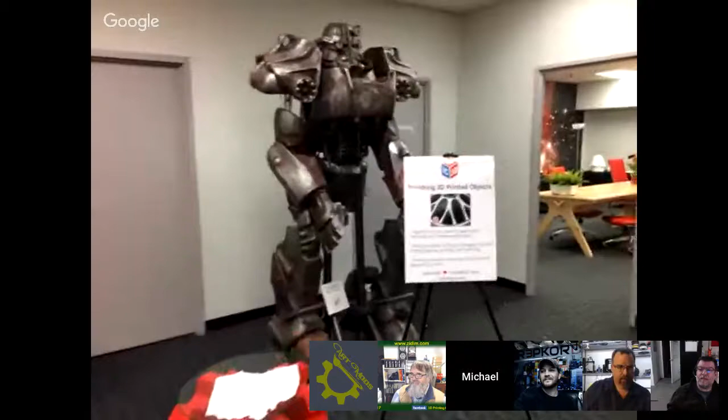This is a Fallout 4 T60. It's nearly all 3D printed, about 100 pounds of PLA. One of our customers, a big cosplayer, Yasu Tano, wanted to pursue this project, and long story short, we ended up sponsoring it, and he retired it, so it's on display in our lobby. Open source coffee table we designed and printed.

This is a main conference room with where we have more of the kind of industrial sample parts. We work with mainly manufacturers from various industries like automotive, people building fire trucks, aerospace, and so forth. There's the 20-inch wheel that we've taken to MRRF and ERRF and other events.

So now I'll walk back to the room of manifesting. So wordplay between manufacturing and manifesting.

So our print service right now has about 20-something printers. This is our largest one. Her name is Norma. She's about 39 inches cubed, about a cubic meter.

Back in this corner, there's about a dozen desktops. Most of them are Lulzbots, TAZ 6s and minis. We've got some gCreate, some FormBots. So some of them have makeshift heater chambers, as you can see.

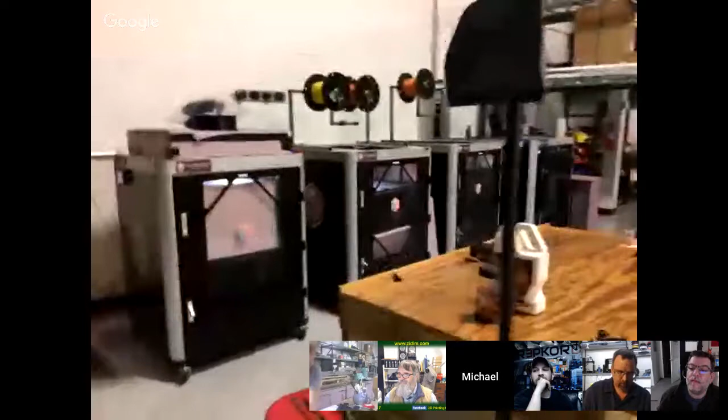Right there, these are 4 kind of medium-sized printers. We mostly designed and built. They're about 24 by 30 tall, printing various things. Let's see here. Another architecture model. Most of the time, I have no idea what's printing.

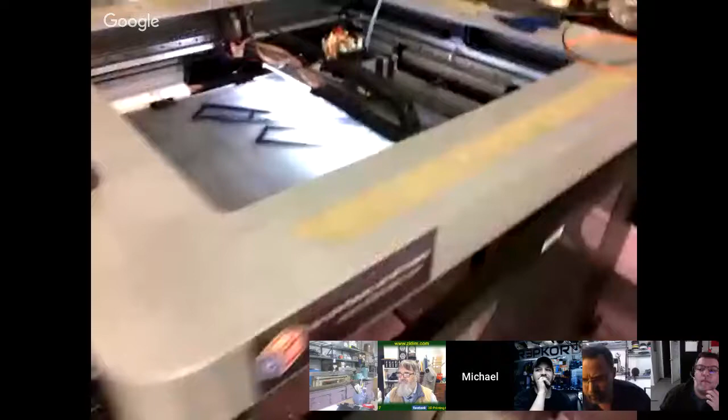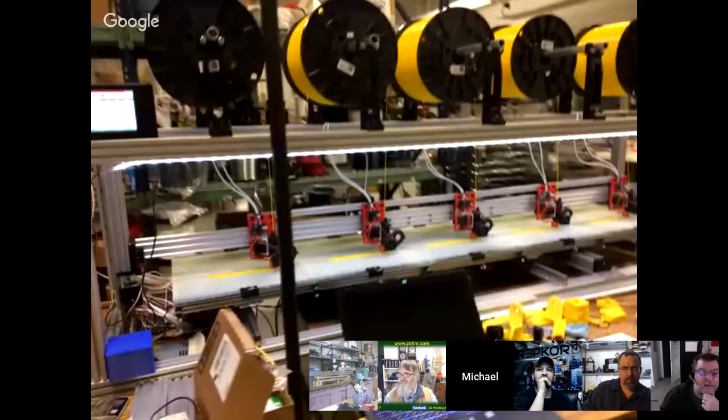Here's a little kind of side project we were doing. This is a printer with 5 heads. So it's basically just like what you would think. It's 1 master and 4 followers. This is about fully loaded. This is about 50 kg, about 10 kg spools. So that's kind of fun.

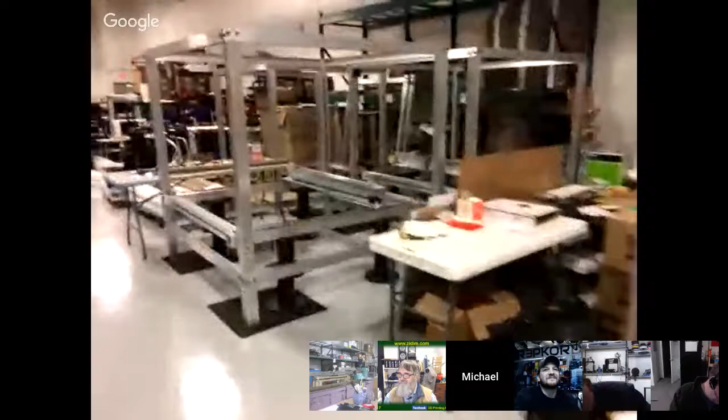Over here, we're building 4 larger printers. These, when they're done, they'll be 48 by 48 by 42 tall. We're doing 4 of these at the same time. To be clear, we do not sell hardware at the moment. We mainly design and build hardware for internal use to solve a problem for a customer.

So you can see those guys. It's going to be all lead screw driven. So the Z will have 4 lead screws. It'll be IDEX. So the gantry there is designed to hold the two X screws. Slides like so.

This is the end of the line with the respooler or the filament winder. And this is where the 10 kilogram spools are produced. And back over here, we'll take those 10 kilograms and we'll respool them into 1 kilogram and 2.3 kilogram. So behind me is the wall of finished goods.

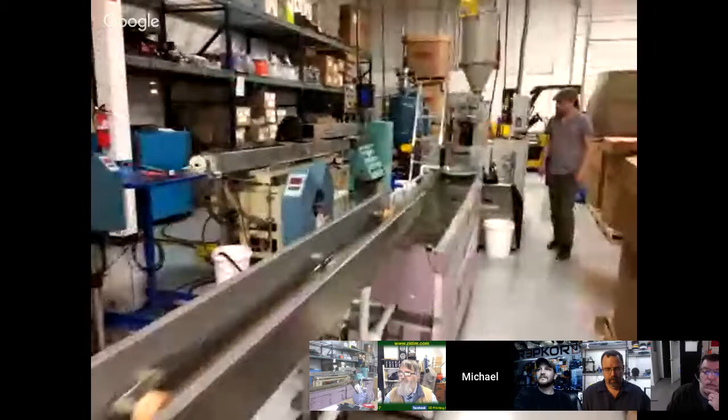So now I'm just walking you to the very back of the building, kind of where it starts and where we buy, or where we house our raw material that we buy. So we get these kind of pallet-sized containers called Gaylords. They're just under a ton, about 1,700 pounds.

So this is our ABS here. So it's just virgin pellets. Looks like rice beads. And then is our PLA, the Ingeo NatureWorks product. Back here is PETG.

And then we keep these bins when we have scrap or purge, when we have to change over the materials or colors in the line, or material that's out of spec. We'll put them back into empty containers, and we have recyclers that come and pick up the stuff.

When you first get resin, it's got moisture, so you have to dry that before you start extruding. We put them through these Novatec desiccant dryers, which basically blow hot air through desiccant and then up through the resin.

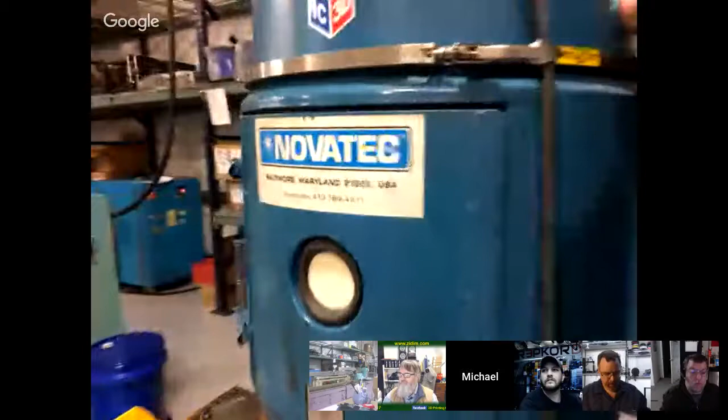Kind of see through there. The boxes on the middle shelf, that's all the master batch - the different colors we use to mix in with the natural resin to get all the colors we want.

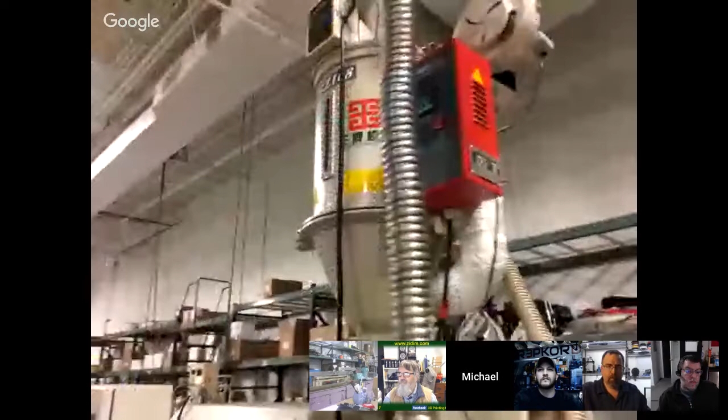And then after that, they get fed into the hopper up there. We have two lines, and this is our newer line, what we call line 2. Again, our material is open source. We decided to go open source a little over a year ago.

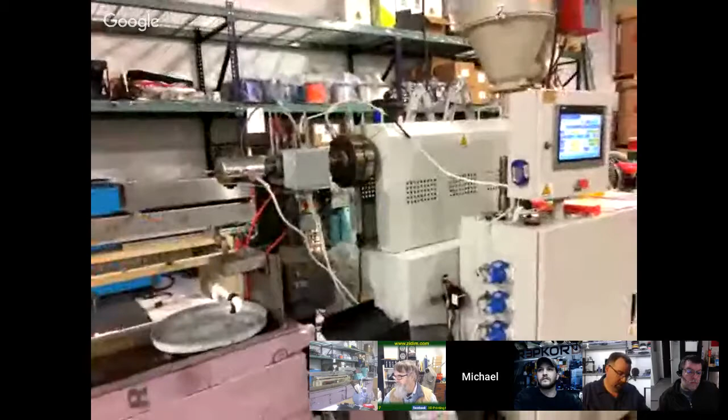A lot of that was in conversation with Lulzbot, but we shared the same values, and our belief was that the more people who know how to make filament, the more material options there are, and the better future we'll all have in manufacturing and 3D printing.

So there's Sean, looking ready, I think. Okay, cool. So I'm gonna let you take it away there. Well...

So I just finished setting up the line, moving stuff around, getting everything ready to rock and roll. The bath is heated, the extrusion line and extruder are heated. There's 7 chambers, and all chambers are heated. We're ready to start making some material.

Are you ready? I'm ready. Okay, so we're going to start with our puller, which is the track, and get that up to speed. We're going to start that and pop it up to about 13, just to get it rolling.

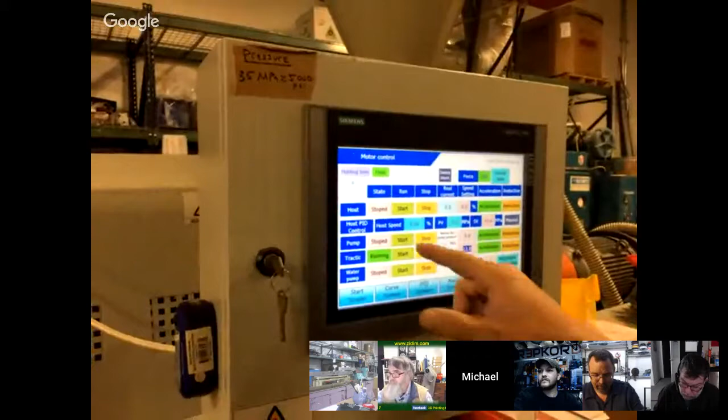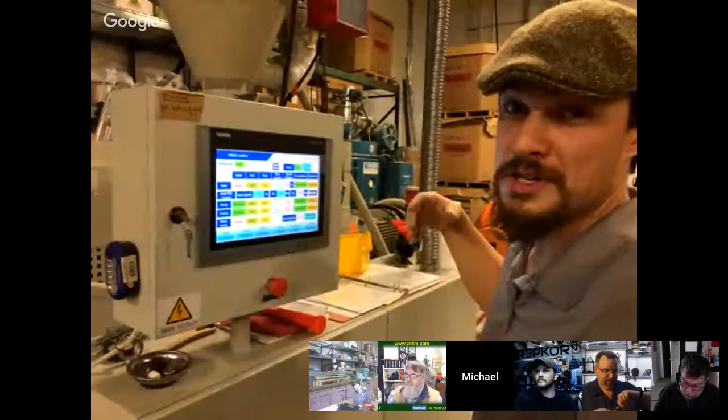And then we'll go with the pump, which is going to be helping pull the filament out of the die. So this is our industrial extrusion - not the smaller one that we have. There's more intricate things with this one than the other one.

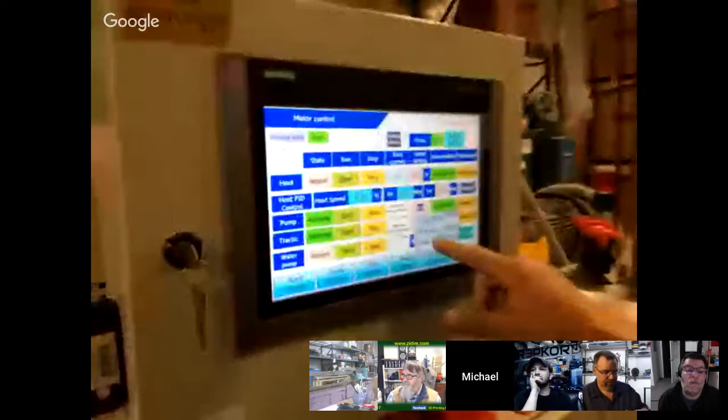The pump I'm going to be putting at about 7. So now filament should be starting to come out of the die. And I'm going to put the screw, the host, up to start at 10.

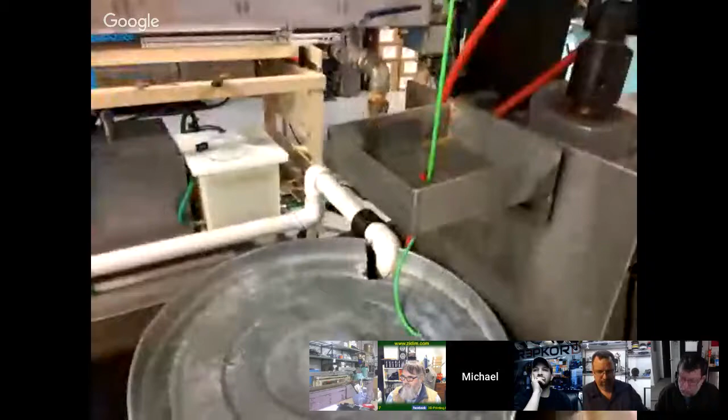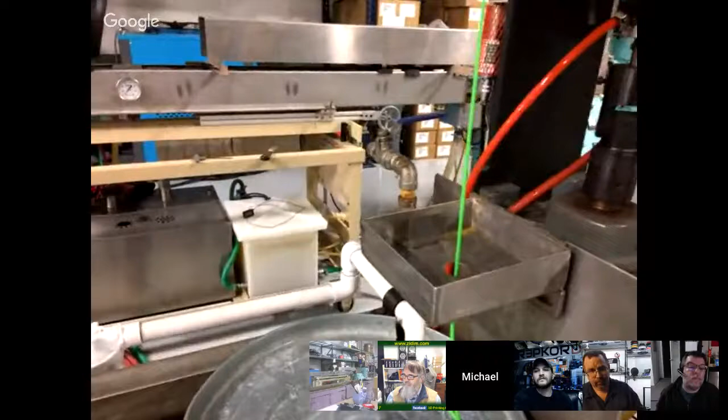That's probably about a little over 5 millimeters coming out of the die right there. And that'll get pulled down to the correct size by the puller.

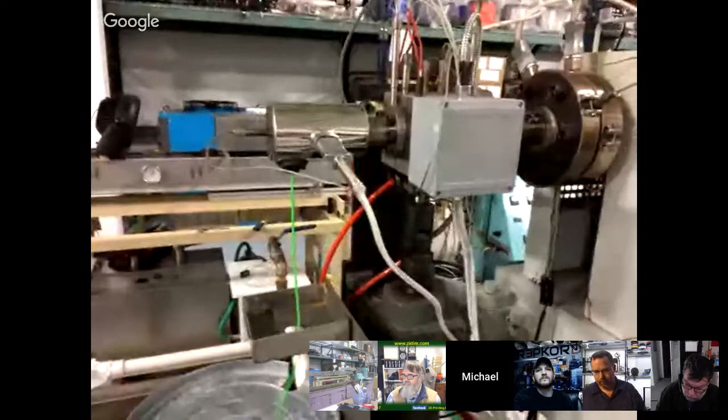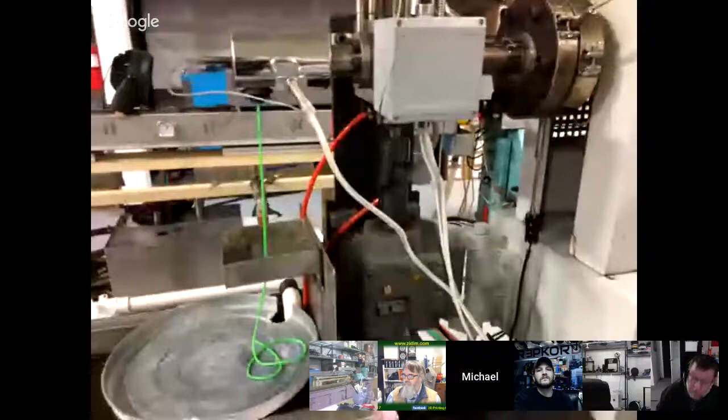I'll show you, let me explain this. This is the gear pump or the melt pump. It sits in between the extruder, which is mostly under that cover right there, and the die. What the gear pump does is it basically controls the volumetric flow rate, because there could be inconsistencies just from the screw itself. By having this volumetric flow control, you get a much more consistent strand, and you can basically pull faster too.

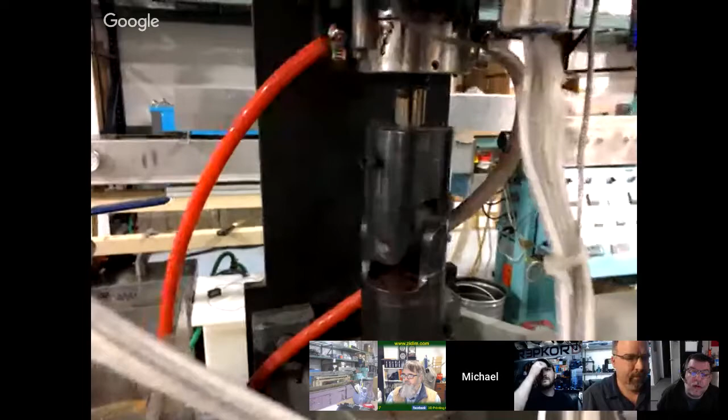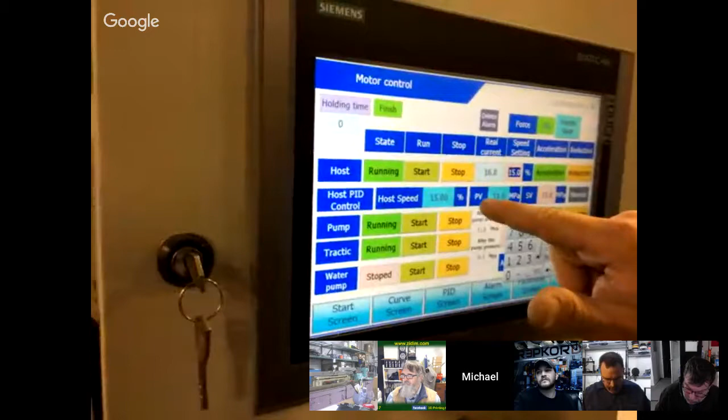So you can see that coupler going there. As of right now, I am just taking - this is PV, pressure. This is the pressure that is inside of the machine. And as this pressure rises, more heat is going to be generated because the screw is turning, creating friction.

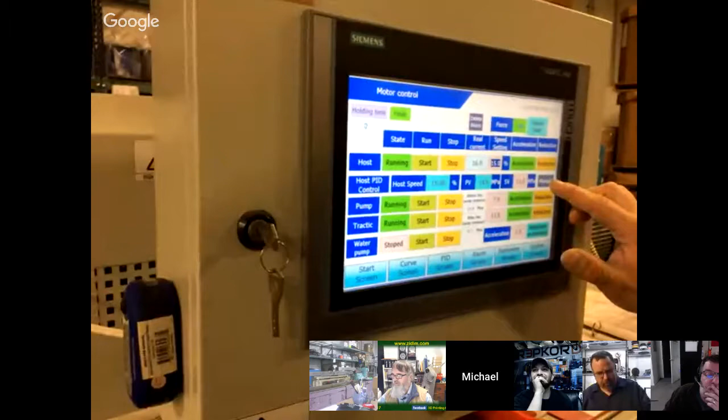Once this number starts going up, I'm going to throw it into auto when it gets to 15. So as of right now, that's all I'm doing at this point. It's boring, bear with me. I'll just make people look at you. That's fine.

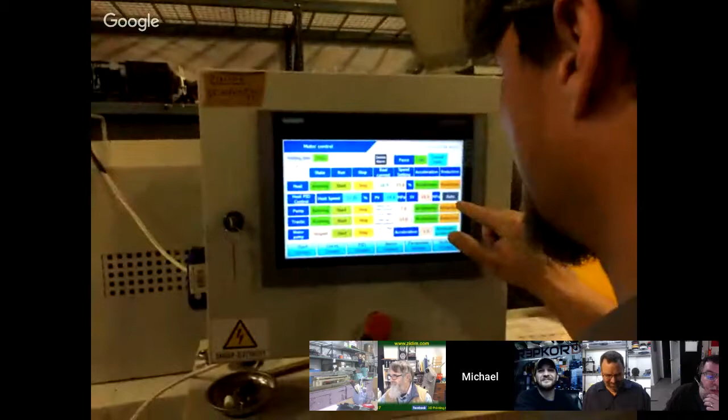There you go, there's an over-the-shoulder shot of you. Beautiful. Okay, so now we have it set in auto. It is going to keep the pressure inside of the machine around 14, 15 in that area. It should keep it at a constant 15 in just a moment - megapascals, MPa.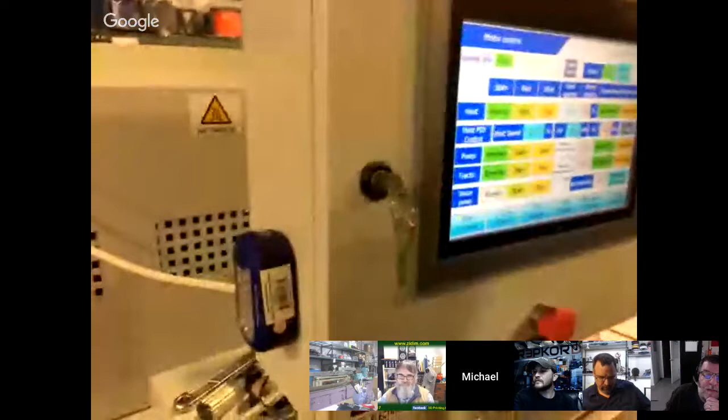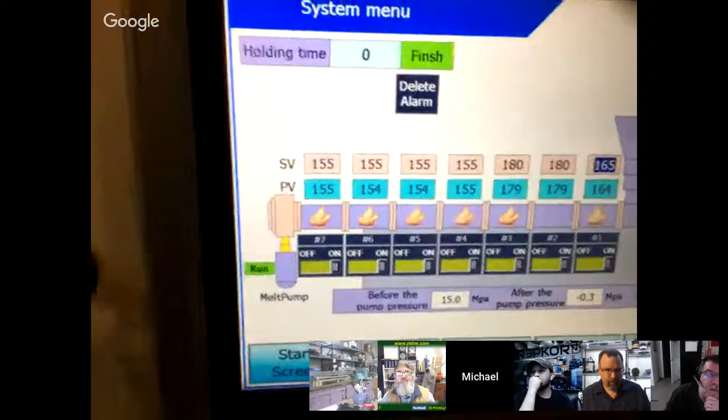Let me show you another screen that's kind of fun. This is where we set all the heat temperatures of the different zones. You can see zone 1 through 7. You'll see the little fire icon - that means it's, like PID, it turns on, kicks on when it needs to. You'll also see a little blower icon when it wants to cool.

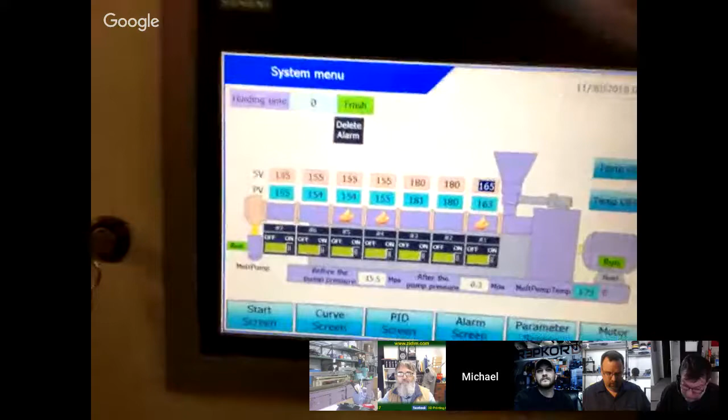So seven zones. Basically, zones one to 3 are heating the barrel of the screw. Zone 4 is this guy, which is where the breaker plate is - basically that's where we separate and take off to clean the filter. There's a little metal steel mesh filter in there. So all of this is zone 4 right here.

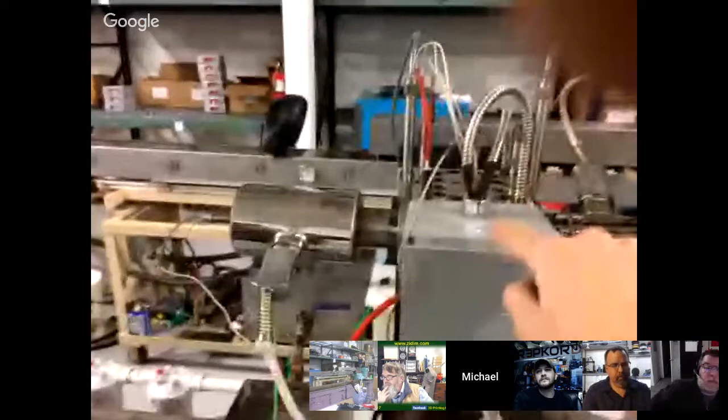And then the melt pump, this gearbox thing right here, there's zone 5 and 6. And then zone 7 is the die.

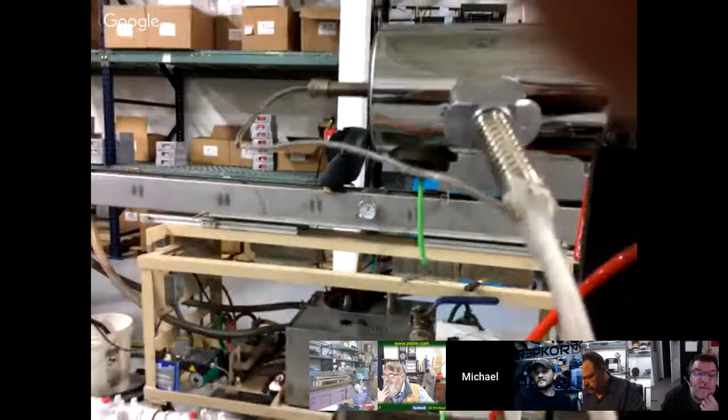So we're about to cut this. We go scoop, pull, ready. Then you snatch it and you pull them along - very slowly, very gently.

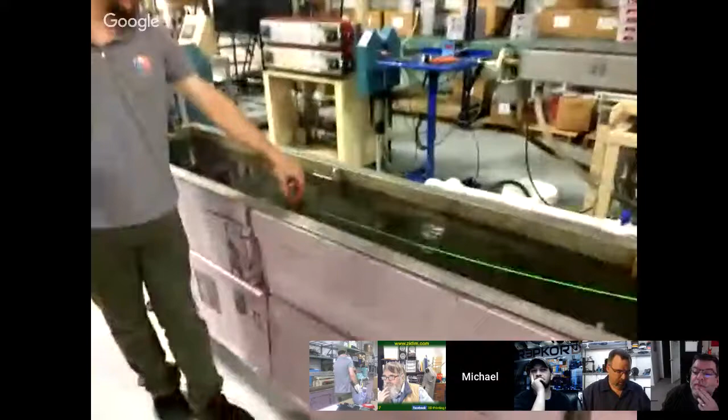So this is stringing up the line. It pretty much has to be done at the beginning of the shift, beginning of the day, because you're basically trying to take melted material there and feed it eventually through the puller, which is going to pull. It's like the drummer in the band - it's gonna keep the beat of everything, and that's how you tune in your size.

So this water bath is heated water. That's the water, kind of the industrial water heater right there.

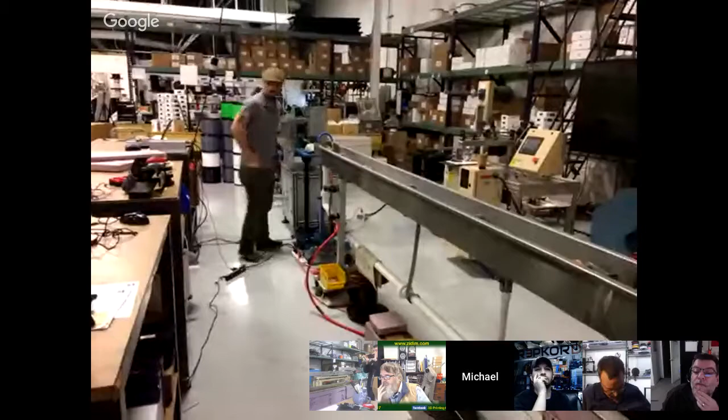So Sean is hooking up the equipment. It's going to get a little loud, so I'll step back for a minute. He said that is the air wipe or air knife. Its purpose is to blow all the water off of the line. Sorry, it's going to get loud as I walk past this thing.

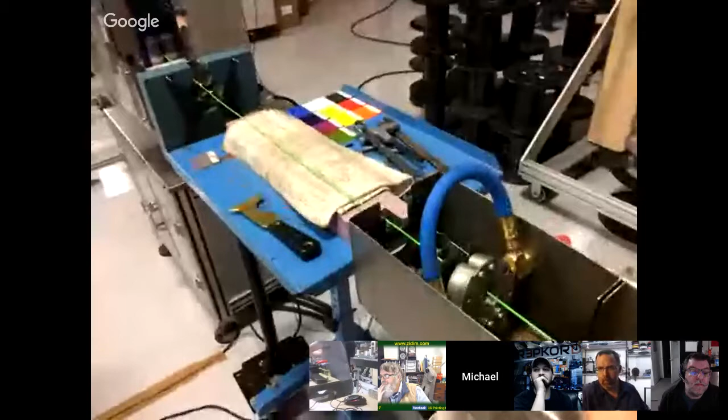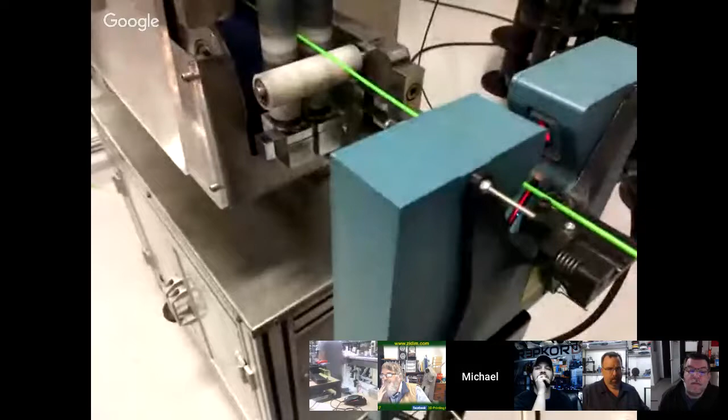But that's the air wipe right there. That guy is our laser gauge. It's a dual axis laser gauge.

That's the puller. As you see, it's just dumping the filament on the floor right now because Sean is going to tune everything and make sure the reading on the laser gauge on our app is in spec before he starts putting it onto a spool.

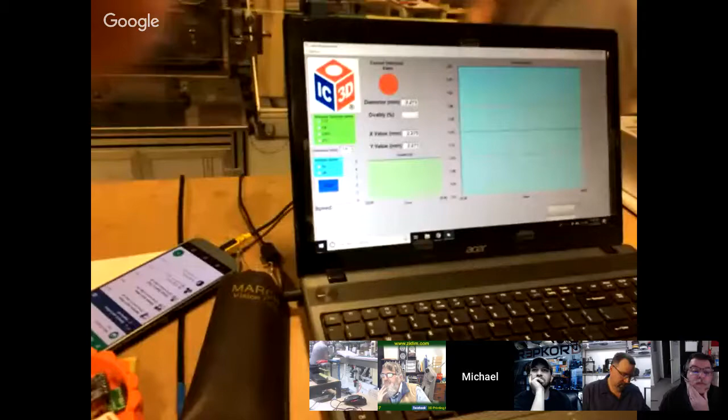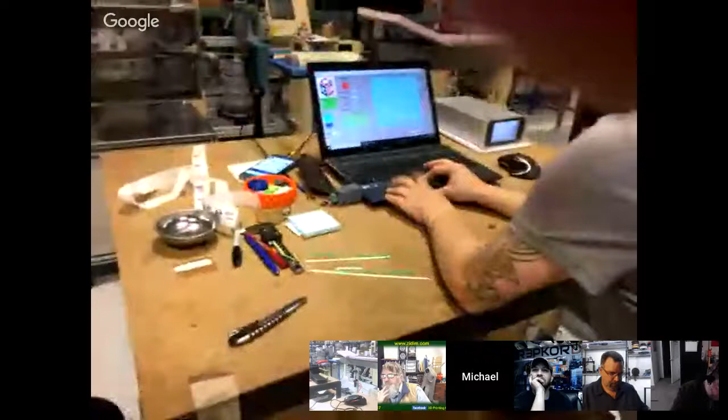While he's setting things up, this is what the app looks like. The laser gauge is basically taking two measurements 90 degrees apart, so you get an X and Y measurement, and that outputs in real time. It also calculates the average diameter, but also gets us the ovality or roundness, which we get as a percentage.

Hey Michael or Sean, can you guys hear me? This is Chris. I had a good question in the room. Jim was asking what is your spec tolerance on the filament diameter?

Our spec tolerance that we advertise is plus minus 0.05. Internally, we keep our spec at plus minus 0.03. Oftentimes it's averaging 0.025. Pretty respectable.

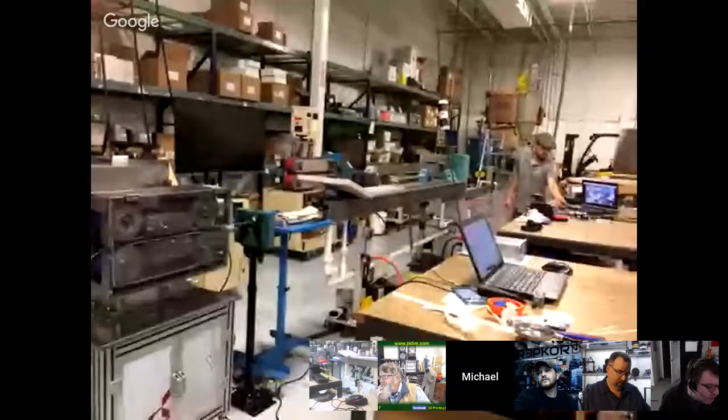Also, there was a question earlier, I think from Robbie. They were looking for some examples of things you've done, services or jobs for the commercial space print-wise. I pointed out the wing you did for the rally car, but maybe you have some other examples worth sharing. Yeah, sure.

Sean's still setting up, so I'll walk you to the sample room and show you a couple more industrial things that we do. Just take a minute, turn you back around.

We work with a lot of automotive manufacturers, so we're literally prototyping car parts for them, like this, so they can build up a whole assembly. Looks like this is part of a door panel.

This is from a lot of vacuum form molds we've done, probably 50 or 60 this past year. This is an example, printed out of PC PBT, and this was something our customer vacuum formed over.

This one is made from DuPont Hytrel. We do this for a tire manufacturer, and we'll print this as a full circle, about 3 feet in diameter, with a hexagon pattern. Let me see if I can arrange my phone to show you how this behaves.

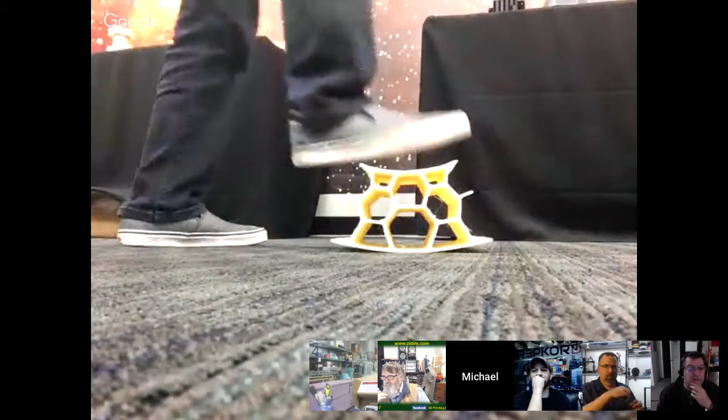You guys see that? So this is made for Humvees, off-road vehicles like ATVs, and commercial lawnmowers. It's airless, so it's puncture proof technically. We do those prototypes.

This is a part before the support is removed. These go to a local company that makes fire trucks, Sutphen, and the products go straight from our printers to their assembly lines, where they're assembling it onto their customers' products.

We do a lot of jigs and fixtures like this, things that just go into factories. This is a stamping mold we've done. We've formed about 1 millimeter thick aluminum over it. This is hydroformed, and what's interesting is you can actually see the 3D printed lines pressed into the sheet of aluminum because it was formed at 11,000 PSI.

Michael, do you know what material that was printed out of? Was it PLA, ABS? Yeah, this was an initial experiment, an 80% infill PLA. So this is literally just a brick of plastic. Nice.

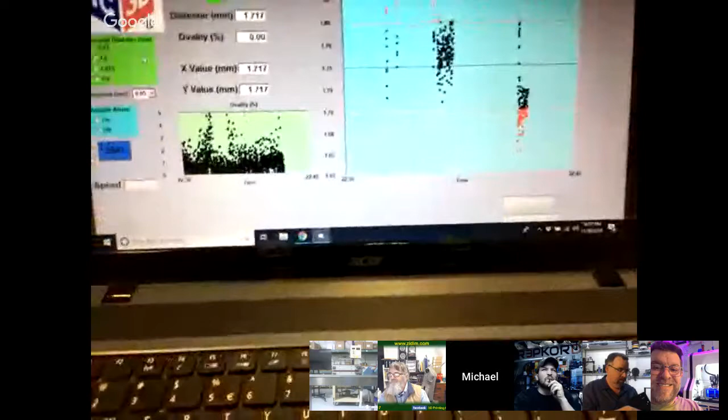So this is what it looks like right when we started. The dots are all over the place, as you can imagine. This is what Sean's trying to do - he's plotting real-time data, and as you can see, that black line is nominal, and the red is our plus or minus 0.05 boundary.

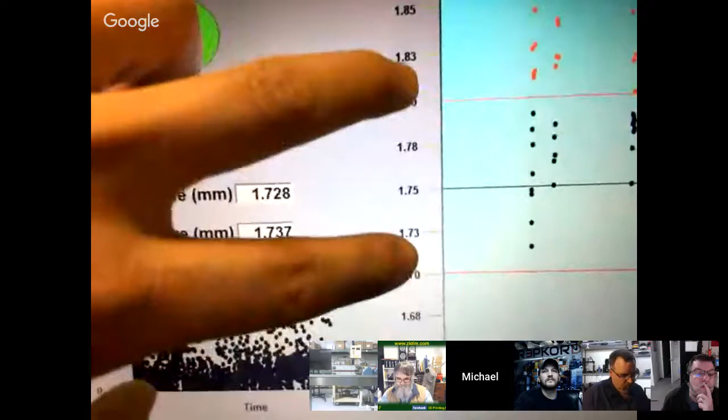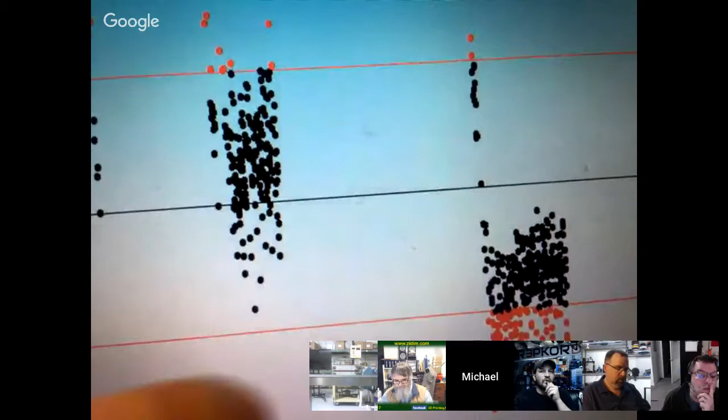Here's a grouping that's about 0.025, 0.03, so it is under spec at the moment. He's going to be slowing down the puller to have that creep up to the nominal. It's not an instantaneous thing - you tweak it, and then you have to wait a few minutes for things to adjust. So it is a process.

Let me ask you about your open source initiatives, because you guys are doing your filament. Are you doing anything else towards that goal?

So the question is about the open source initiatives. We're gonna keep releasing material. The open sourcing is per material - we do the white paper essentially and all the settings and parameters for one material, and that's certified. Then we move on to the next material and the next material.

We started off with just ABS because that's what Lulzbot was using. Then, several months later, we did our PLA. And we just started making PETG this year, so we immediately put those settings out and updated the certs. So yeah, that's our plan - we're just gonna keep open sourcing the material.

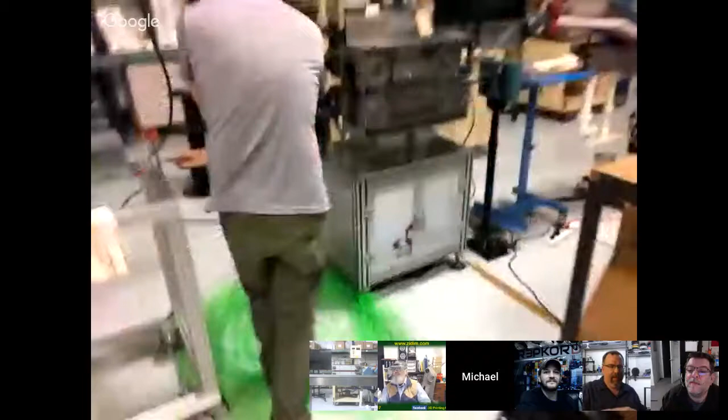175 is especially tough because we pull that much faster, and so it can be a little trickier. What's the largest spool that you spun?

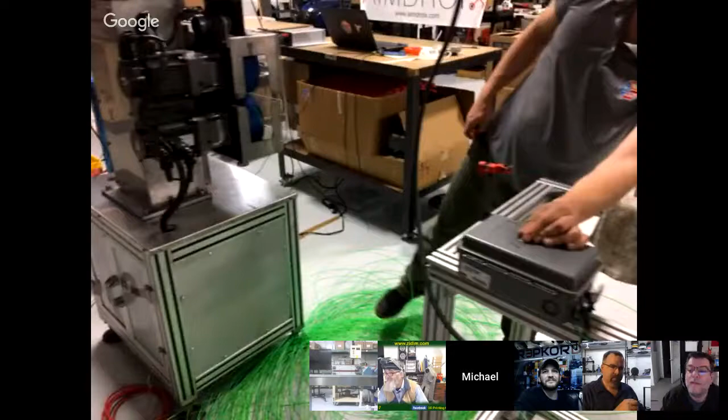Better that all that's waste rather than sent on to customers to get bad tolerances, right? Don't want that in my machine.

Sorry, it's a little loud where I'm standing. Could you repeat that? I was just commenting that seems like a lot of waste, but it's better that it ends up on the floor than actually on the spool, right?

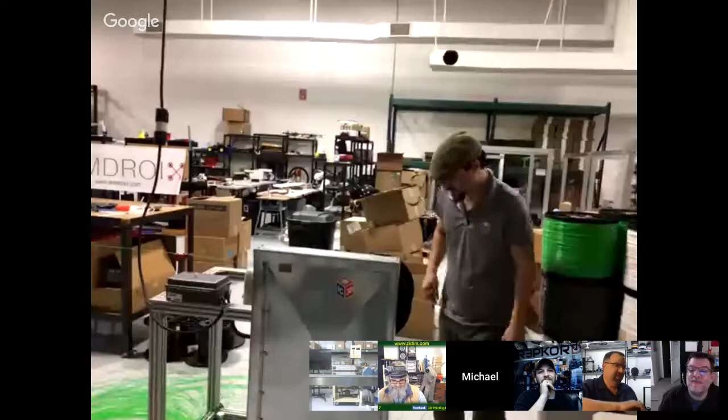Yeah, exactly. There's pretty much no way to get around it that I know of. Anytime you're manufacturing and starting up the process, whether it's injection molding or hydroforming or whatever, you kind of have some waste.

We'd love to just hit a button and out comes perfect material, but that doesn't work. I had Sean at my shop a couple weeks ago, and he got to see all my waste, and that made him cry a little.

I think the best thing you can do is try to be responsible about where the downstream material goes. We have recycling companies come and pick up material. ABS and PETG is much easier - PLA is actually very difficult to find someone to take. It is very difficult to introduce that back into the product stream, and it's also difficult to integrate or blend that with other plastics.

You might have to share who's doing your PLA recycling, because I've been looking over here on the East Coast. I'll have to get that for you. It's someone local.

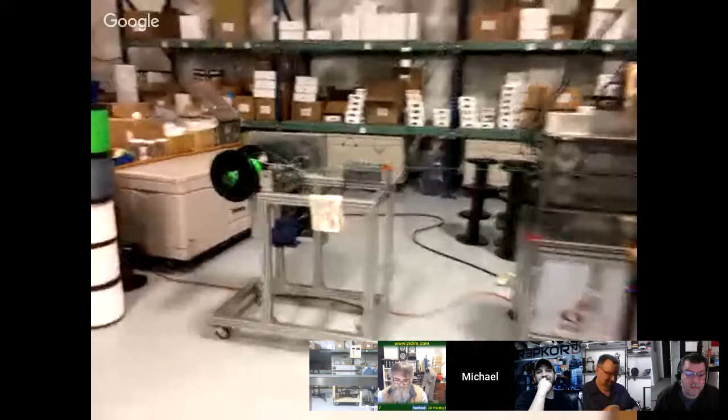So Sean has got that strung up. That's a traverse mechanism there that goes back and forth at the rate we set. We change the rate depending on 1.75 or 3. Does your rate change as the spool gets fuller? No, it doesn't. It typically works out okay.

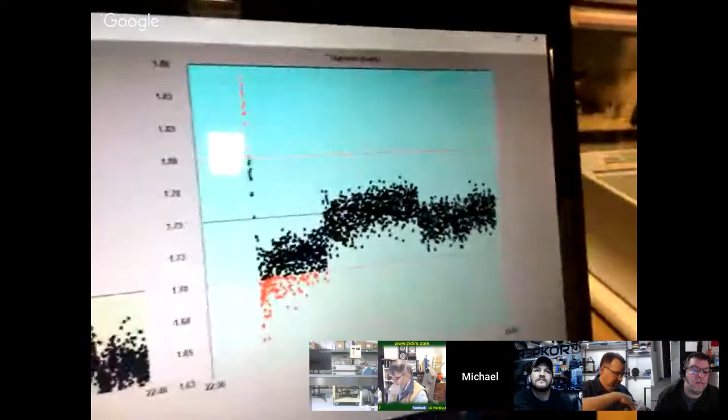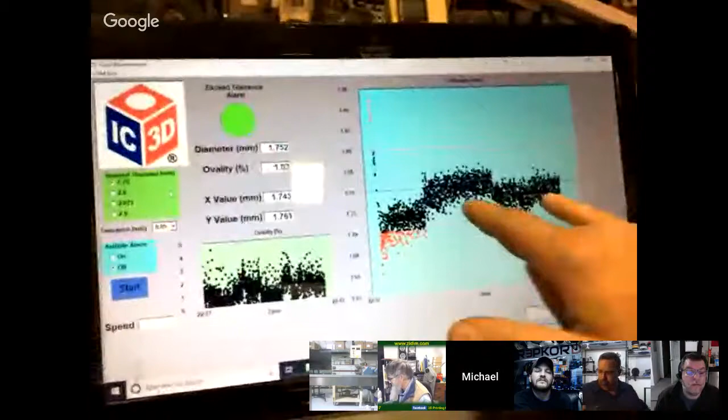Let me show you what the screen looks like. That's a 10 kilogram spool. There's fluctuation here in the variables. The water in the bath is getting colder because I had turned the water down since it was too hot, and the extruder is also producing heat, so it will drop with heat and then bring it up. The slower you pull the filament through, the higher the diameter gets; the faster you pull it through, the lower it gets. So I'm playing with heat and force right now, pulling the filament, trying to get it stable along this line.

How long does a 10 kilogram spool take to spin? This is the part where everything's strung up, everything's rolling. We're spooling it, and everything's logged and marked.

As this is going, I'm going to keep adjusting it as time goes by. It'll get to a point where it's stable, and then it's hands off - you just let it do its thing. Right now I'm just adjusting settings and getting everything to the correct spot.

Sean, what is your time frame for a 10 kilo? Go to a more quiet area and back there, and field some questions. Yeah, I think they're having a hard time hearing us where they're at - it's really noisy. If you've ever hung out with Sean for a little bit, you know that's true - he's loud, really, really loud.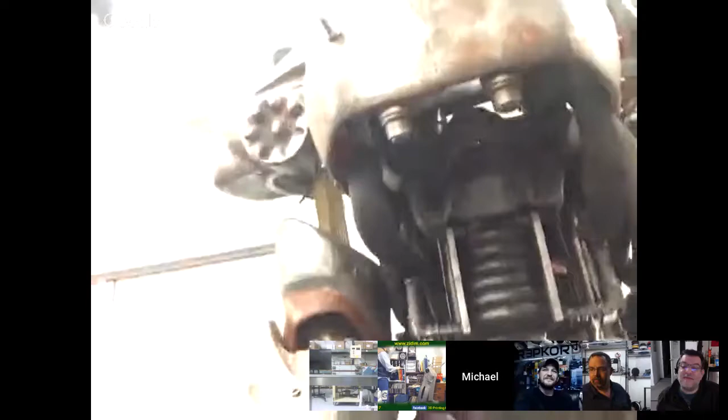See, look at this - we're only 45 minutes into the stream and Sean's already getting taken to the office. All right, he gets to stand in front of T60 here. You guys got to bring that to a show. Oh yeah, it's heavy, I bet. It's guts, and it's kind of crumbling.

So when you're spinning a 10 kilogram spool, how long does that take from the time you string it up onto the spool till you have a full spool? It depends on diameter, but mostly probably about 45 minutes to an hour, for both diameters in general.

What's your setup time before the stream? Sean, you got started early because the extrusion line has to heat up and come up to temp, and the water bath has to come up to temp too. What's your startup time in the morning, roughly? It depends - on a Monday, after it's sat over the weekend, it takes over an hour to heat up because the bath is down to 40 C. During the week, it takes probably half hour to an hour.

One of the big things we're working on is more and more automation in our process - automation and IoT. We've almost got it set up so the water heater will turn on at 5 in the morning, for example, and the line will self-tune itself based on the data from the laser gauge, stuff like that.

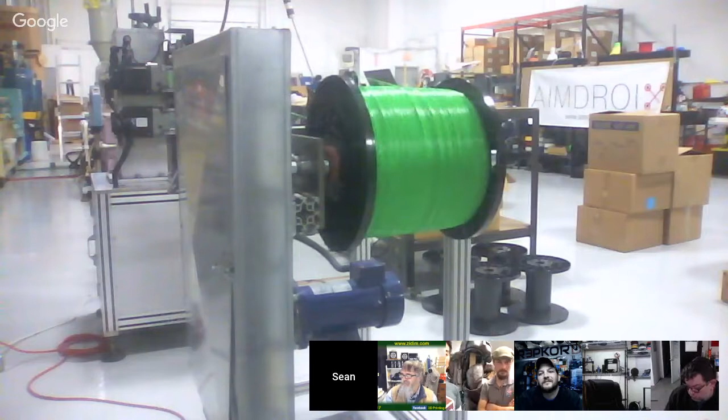Another question for you there - we're about an hour and a half into the show, and your reel's starting to look like it's filling up. About how long does it take to do a full 10-kilogram reel? It's about 45 minutes to an hour. It's 175, so it's most likely about an hour.

I really started spooling it up in the beginning of the show. It's running a little slower right now, maybe about 30 minutes in or so. Just about an hour ago, I think, that you started. It's slowing up right now, not running at full speed, not at normal operating speed. Yeah Richard, thanks for pointing that out - I didn't even realize Sean moved his camera over pointing at the spool.

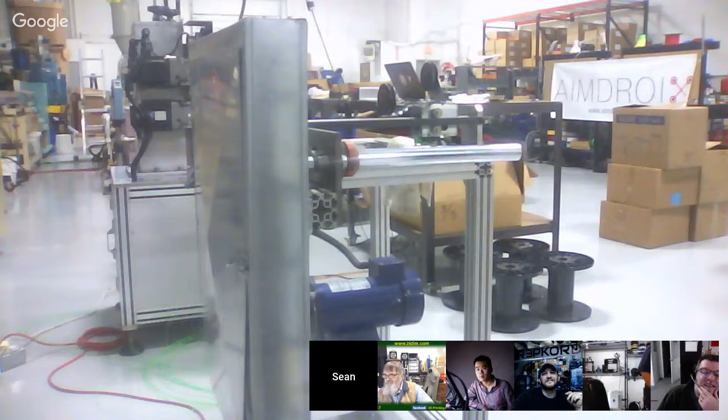You're gonna go ahead and shut down, right? Yeah, I'm shutting down. Okay, I'm gonna go back to the front and say you're shutting down and field any other questions. While they're getting situated, looks like they're shutting the line down now. Yeah, sorry about that. So Sean is shutting stuff down right now. I just moved back to the office, a little more quiet, to field any other questions.

I guess that actually raises a good question. So now you've ended for the day, you're done running spools - how long does it take to shut down the line? Do you have to wait a certain amount of time to make sure things cool down, or do you guys basically just hit the kill switch? It doesn't take too much time. We'll definitely turn off heaters and stuff like that first, but there's some other cleanup to do.

Make sure the air compressor's turned off and other pieces of equipment turned off and put away. By that time, 15-20 minutes later, things are cooled enough to walk away.

Something I keep thinking about throughout the stream: we've seen Protopasta do their weekend filament class, however you want to call it. Have you guys looked at doing anything like that since you're out closer to the East Coast? I'm unfamiliar with that format. Tinker just jumped in the chat from Protopasta - they're doing a weekend thing every so often where they take people and tour the filament extrusion, and they actually make their own filament. Have you guys thought about doing anything like that?

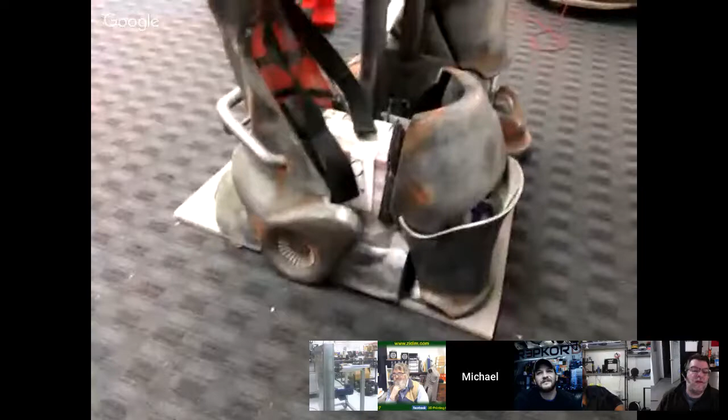Let me turn this back around. So the person - let's see, that platform is about 1.5 feet - stands on that, straps that on his legs, arms kind of go in there. This is on a PVC pipe frame, kind of like football shoulder pads that you put on. That's pretty cool.

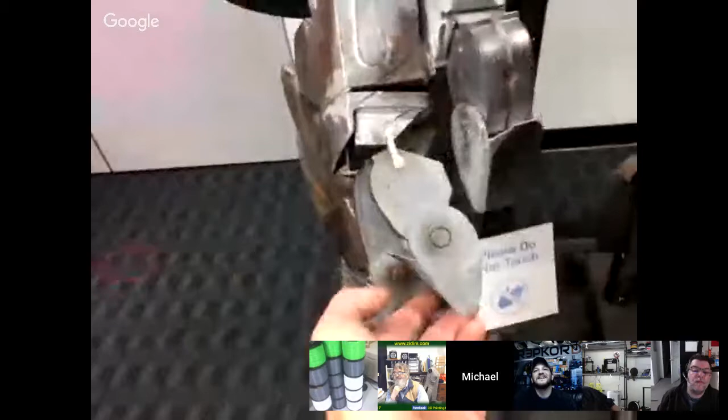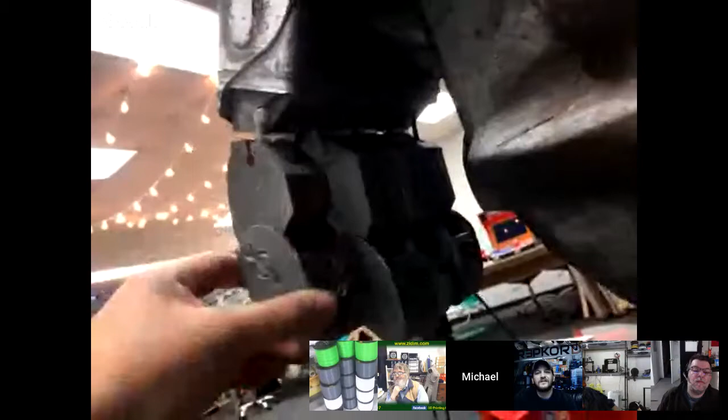The fingers move with TPU joints, pulled by strings on the inside. Let's see here, you can see there, maybe. Are you at liberty to say who made that one? Yeah, his name was Yasu Tano. That's pretty neat.